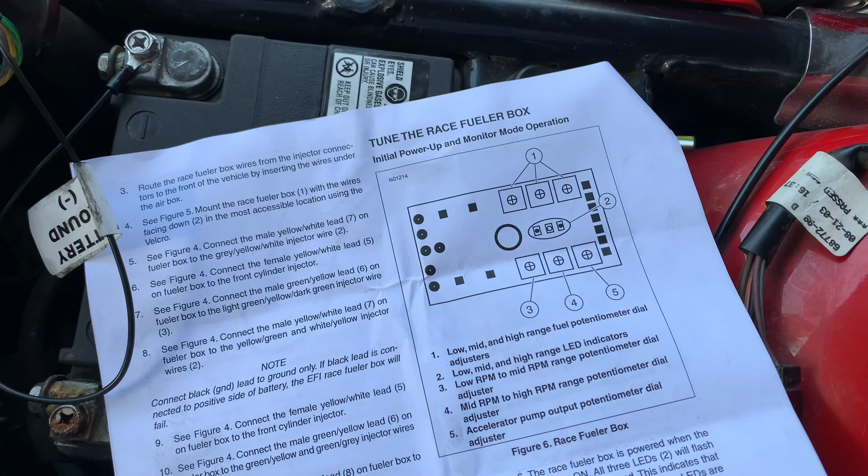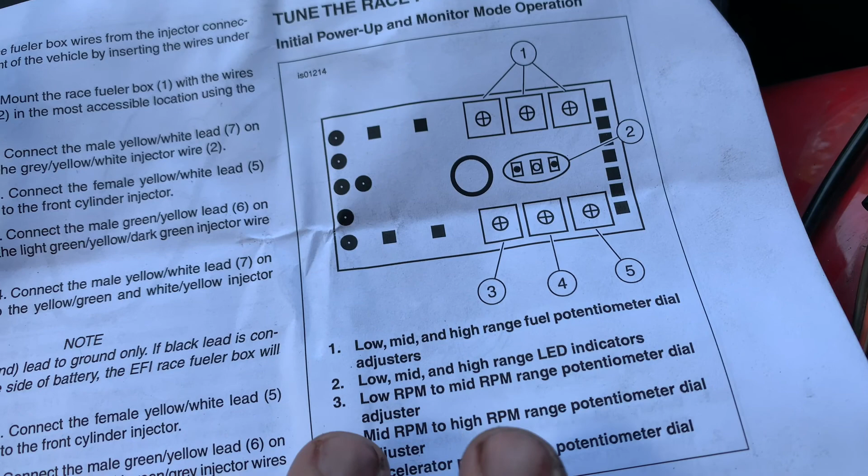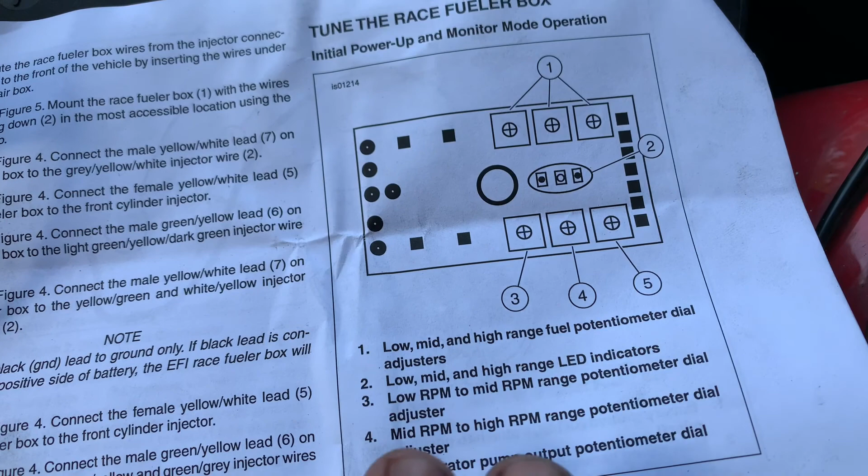So adjusting this thing, you've got 6 potentiometers on here. You've got low, mid, and high ranges, which is these right here, 1, 2, 3. And then you've got low, mid, and high range LEDs. Now the instructions say it's red, yellow, and green, but mine does green, yellow, and red. I've seen some backward stuff there.

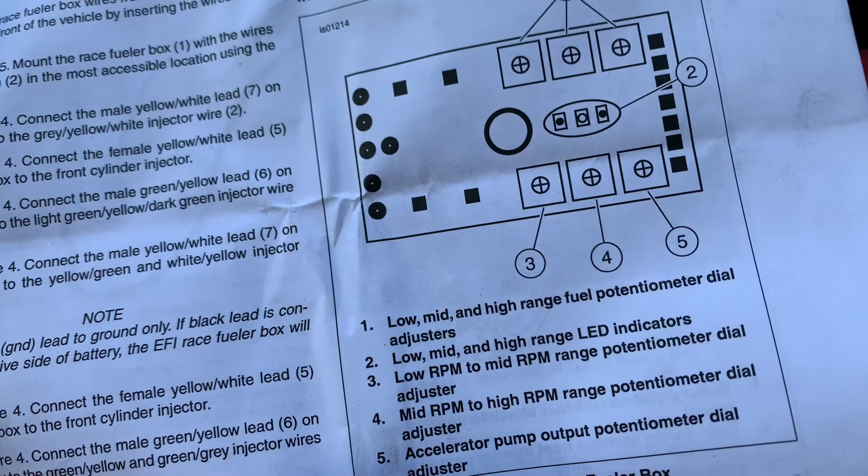So my lights are actually backwards from what the instructions say, but that's a little strange. Number 3 here, which I would call 4, is the low to mid range. Number 4, which I would call 5, is the mid to high range. And number 5 here, which is 6, is the accelerator pump. So I'd go 1, 2, 3, 4, 5, 6 - in the description I'll list them out that way. Just know 1 is all of those, 2 is the lights, 3 low to mid, mid to high, and then your accelerator pump.

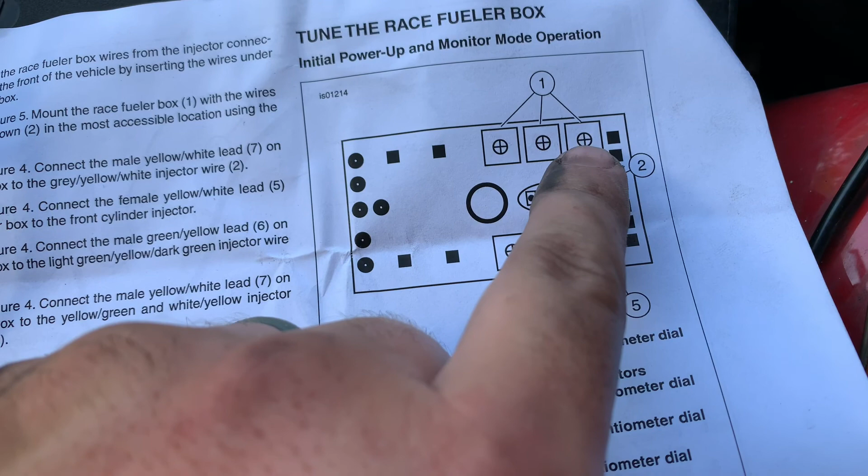So you can adjust how much actual fuel flows out of this thing - these are all your different fuel settings. You've got from -10, number 1 would be 0 on the potentiometer, and then it's percentages up from there. I'll list that out in the description. 3 is your RPM level, 4 is another RPM level, and then 5 is, like I said, the accelerator pump.

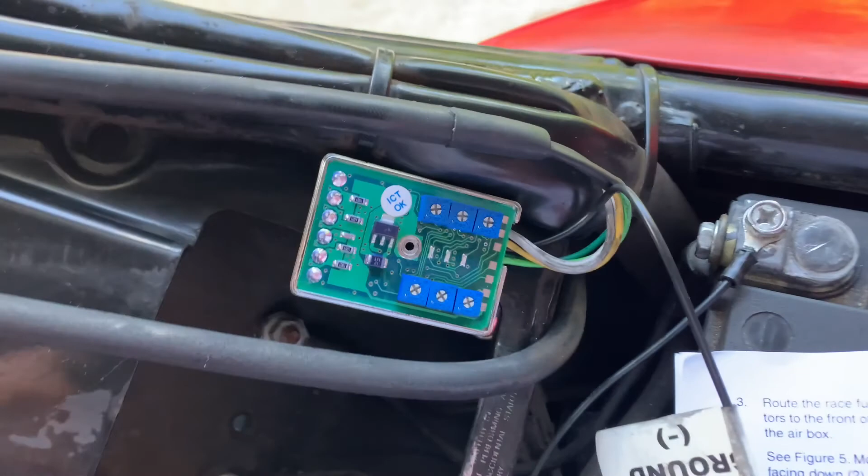So this is where mine are set up currently. On number 1 here, which is your lowest setting, I've got it just about right at normal. So this is -10, this is normal, and this would be +10, or +5, and I'll mark all that out. This one I've got set up a pretty good bit higher - this would be all the way 0, and I've got it up around 4.5 or so. This one over here I've got up right at 5, and that's your highest RPM level as it kicks over.

Now that's only 45 to 55 on a stock bike, which is pretty high up there. Both of my RPM ranges I have set as low as possible, so it'll kick into those on a lower setting because I don't want to run too high up. And I've got my potentiometer for the 6th one set up at, I think, like 40 or 50% of the fuel that's kicking in there. It's going to kick that much more when you twist the throttle or under high torque or anything like that.

So another thing we did was go ahead and put on this fairing. This is the Burly style fairing, the sport touring one - it's just like those. Painted it red, doesn't match exactly. I actually bought Harley Firefighter Red because it's the Firefighter Edition, and it didn't seem to match perfectly either, but it looks okay for now. I'll do something about it later on.

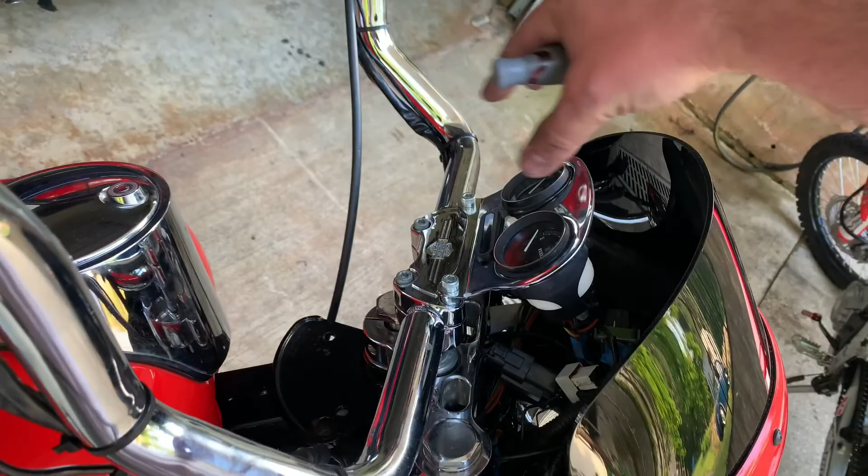But it all went on pretty good, wasn't too bad. Gives me a good place to hide all my wires. And then we're gonna make another dash to fit a speedo and everything in there.

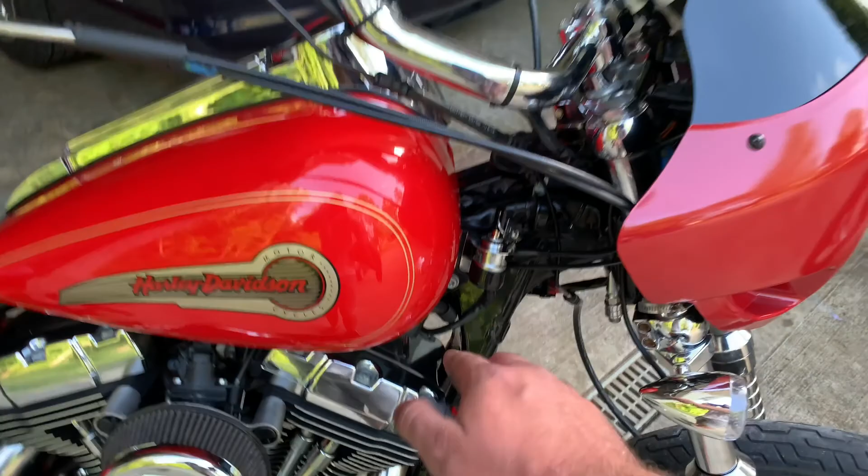So I went ahead and did, these are 2-inch tank risers. So it brought it up a little bit, but I mainly wanted to kick the tank forward. So you see down here, I had to make this other little plate - this is where it would normally bolt. So it's moved forward a little over an inch, not a full 2 because it gets kicked up some, but it opens up the engine a little ways. Gives a little more, I don't know, chopper style - looks a little bit different than normal.

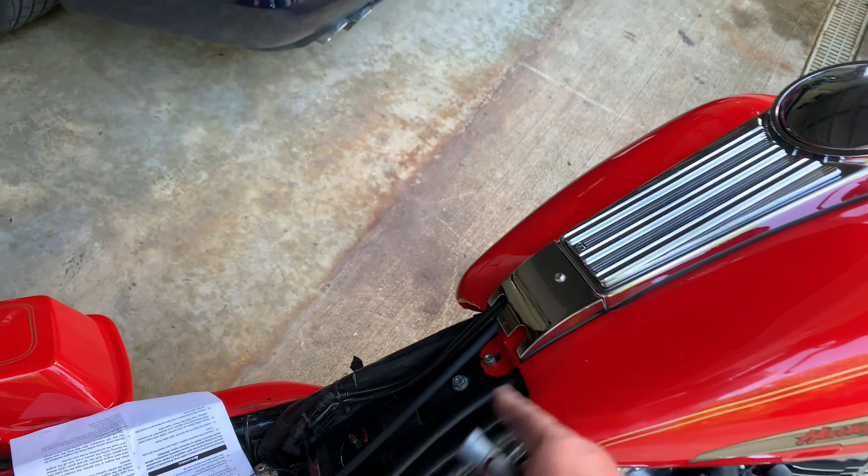Now this nose on this seat is the short one, so there's actually a gap there. With the longer nose seat that would normally go to here, it would just come down to there. So I may end up changing the seats around, doing some stuff. But that's pretty much it on that - I can kind of show you how the bike reacts.

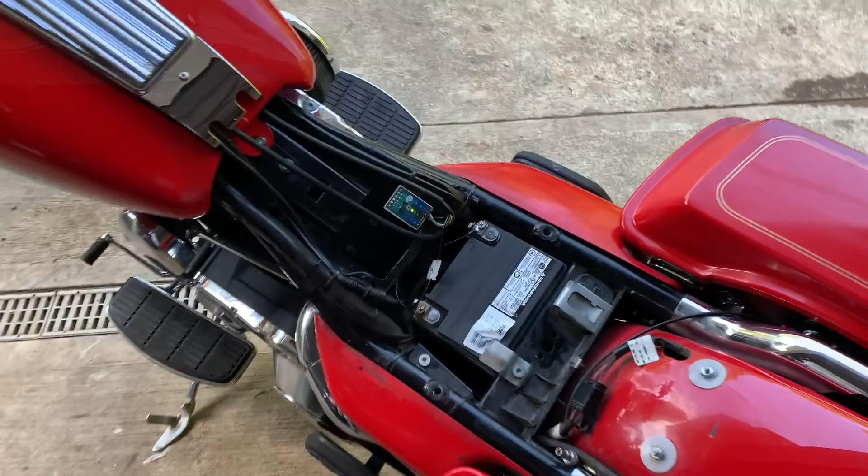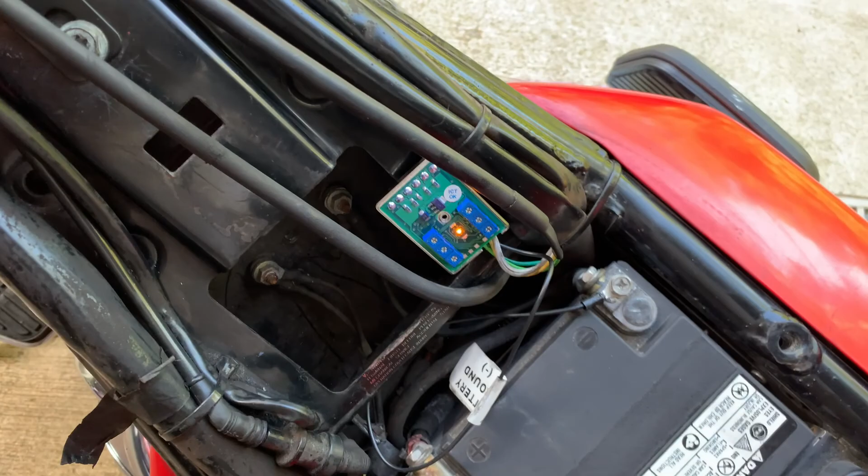Alright guys, so I got it set up now. You see that the green on mine is the lower setting. As soon as I come up off of idle, it will automatically switch over to orange, which is your mid-level, and it doesn't hit the high until you get up to real high RPM, like that. And it'll come right back down to idle, back to the green setting.

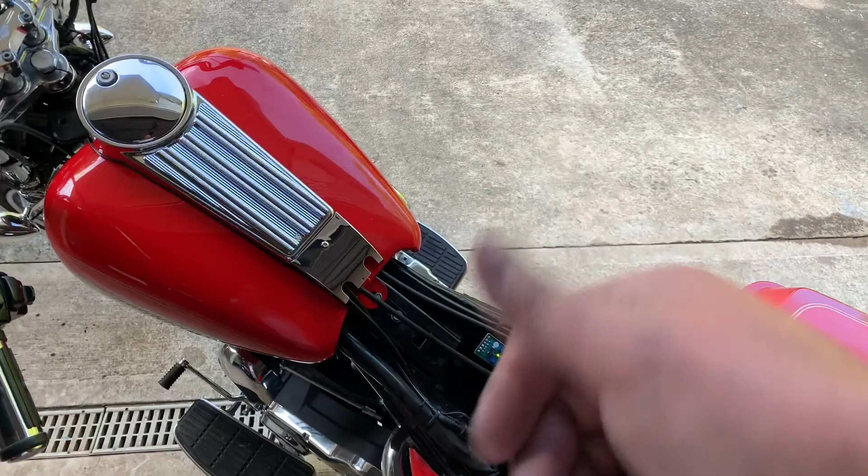That's just how I've got mine set up. So the lowest setting is down right at idle, and everything else picks up from there. Seems to work well on this bike, gives me a good idle - if not, the idle revs up pretty high. So you just kind of got to play with them and see. But like I said, check out the description, I'll list it out a little bit better in there about how everything works. But that's pretty much it on this - I think it's going to work.

So the last thing to do is put the little cap back on here. Get that back on there, should be good.